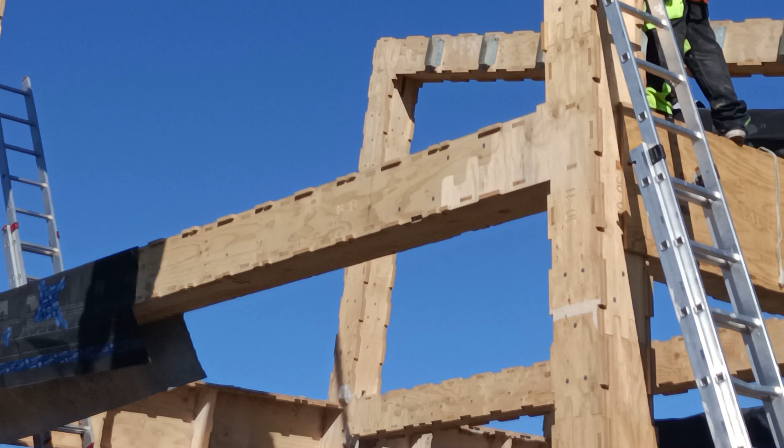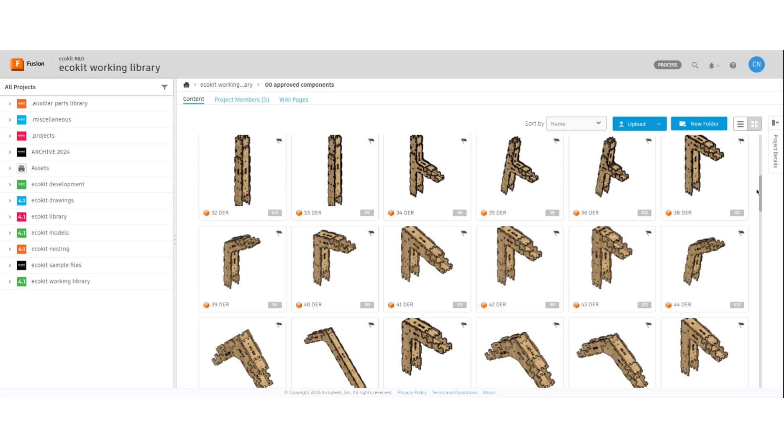EcoKit is more than just a house, it's a system, a prefabricated, component based construction method designed for efficiency and adaptability. Our advanced 3D library allows us to explore endless design possibilities, ensuring a home that fits your needs and site conditions perfectly. We have created a library of components that easily fit together and lock in place for superior structural integrity. They are interchangeable, allowing for diverse shapes and layouts.

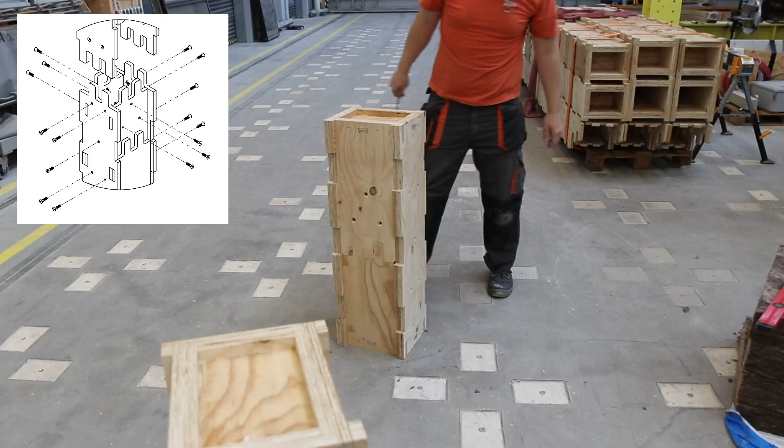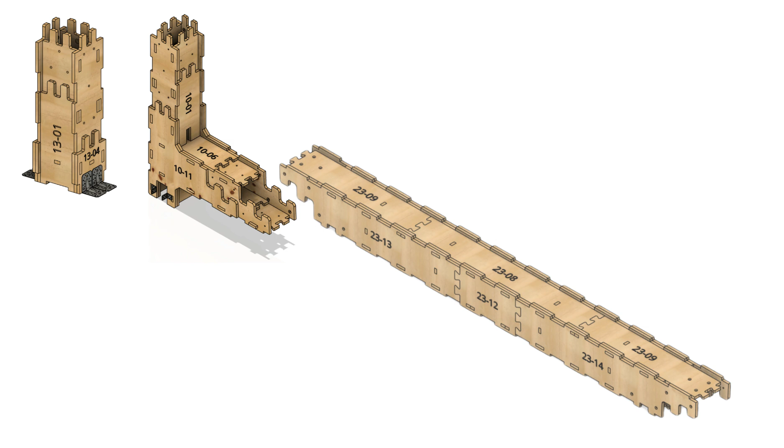Our system includes components for attachment to concrete slabs or installation on piers and pilings with a fully insulated subfloor system. It features beams in multiple lengths, posts and columns of different heights, joints and corners at varying angles. Additionally, we provide standardized sheeting for bracing and have developed our own version of an I-joist, aptly named Ply Joist.

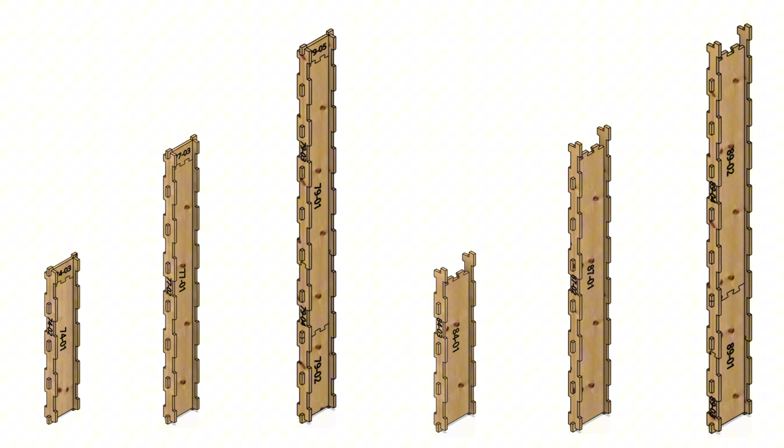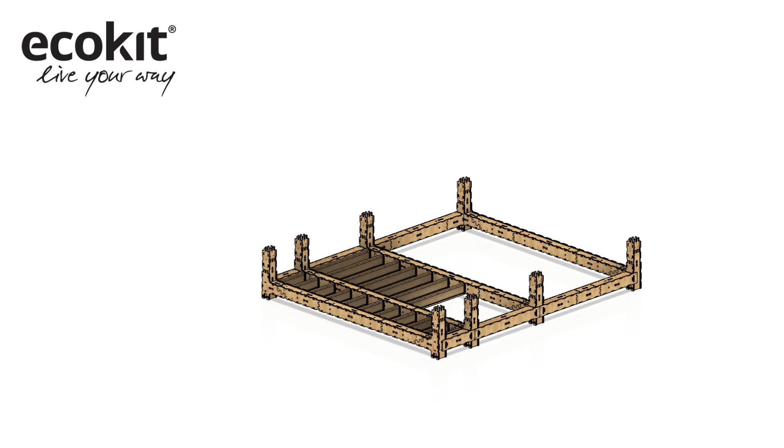Watch as we take a structure from concept to reality in a matter of minutes. Using our interactive 3D library, we can explore, configure, and visualize your home in real time. Each component is designed for seamless assembly, meaning less waste, faster build times, and fewer headaches.

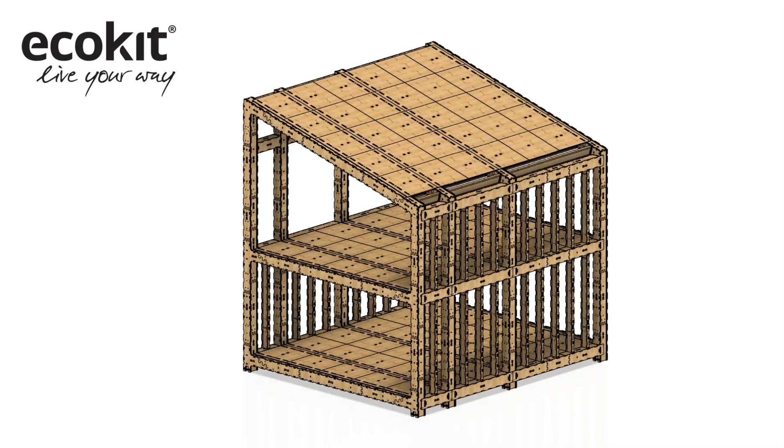Here's how it all comes together. Our precision cut components fit seamlessly, making assembly faster and more efficient. With the right planning, an EcoKit home can be weatherproof within days, cutting construction time significantly compared to traditional builds.

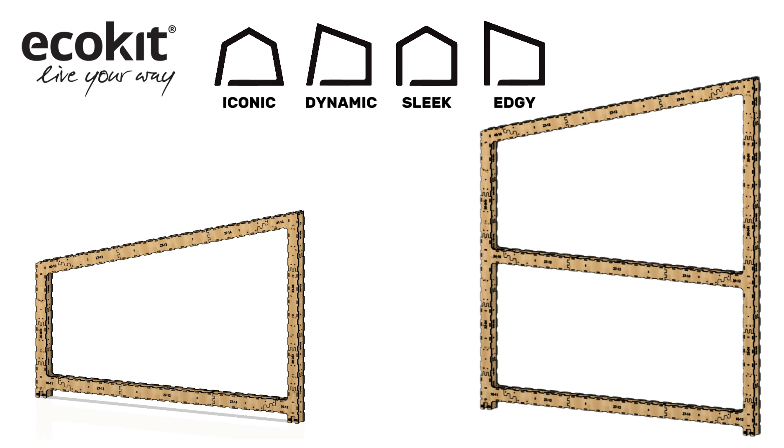With EcoKit, you're not limited to a single design. Our modular components allow for a variety of shapes and layouts, adapting to different landscapes, climates, and personal preferences. From compact cabins to spacious family homes, your imagination is the only limit.

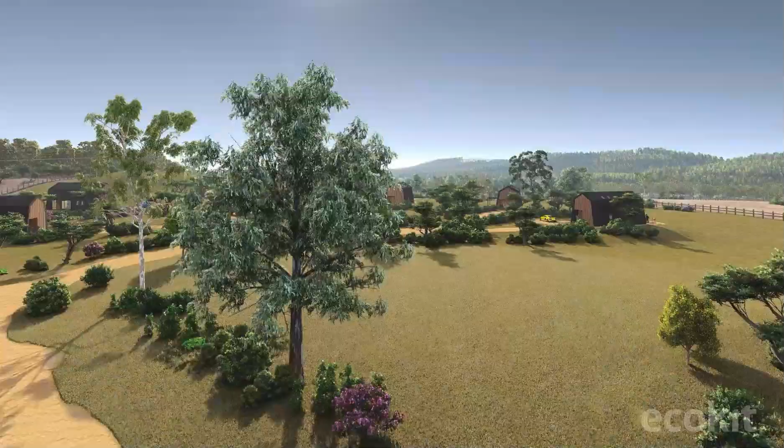EcoKit isn't just a concept, it's a proven system. Take a look at some of the stunning homes we designed for our clients using the EcoKit system. Each one uniquely tailored to its owner's vision while maintaining EcoKit's core values of sustainability, efficiency, and adaptability.